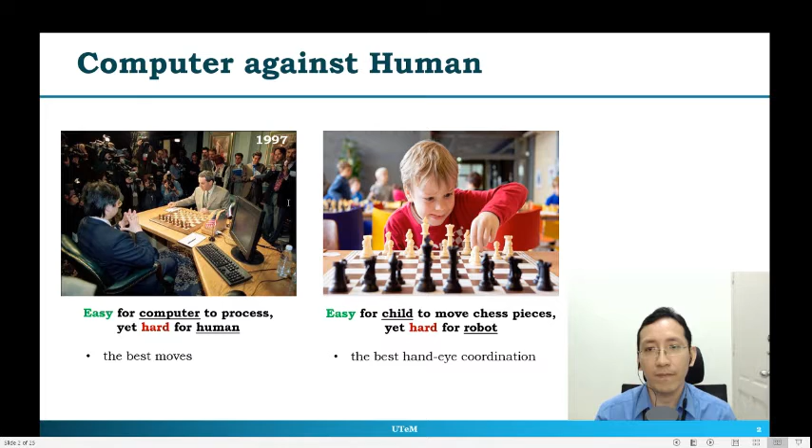But notice that in the second image, it's easy for even a small child to move the piece of the chess, while it is difficult for a robot to do so. Robots are not that good at understanding things in their world, obviously not good at visual perception, and have abysmal hand-eye coordination. So this is the cutting edge research in robotics.

When we think about robots, the definition itself comes from fiction. The way people see robots at large, like in the movies Transformers and Star Wars, is as intelligent beings that have the ability to think, move, and even have feelings. They are as well powerful, flexible, and have many forms. While the fact of the matter is, the character is portrayed by none other than us, humans, dressed in very mechanical appearances. So that is the irony of intelligent robots.

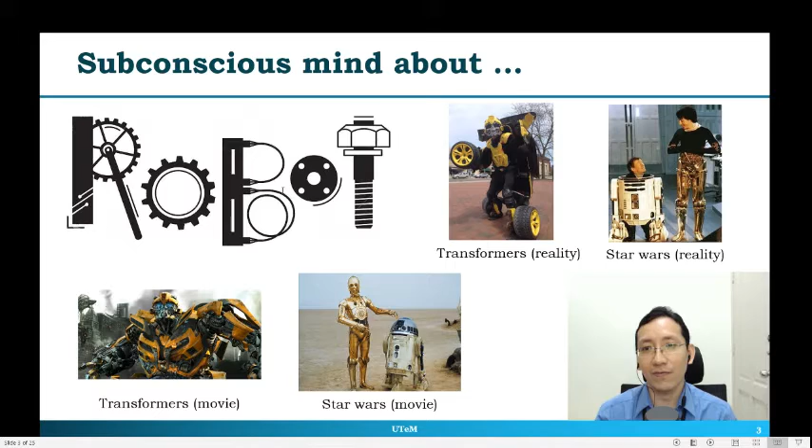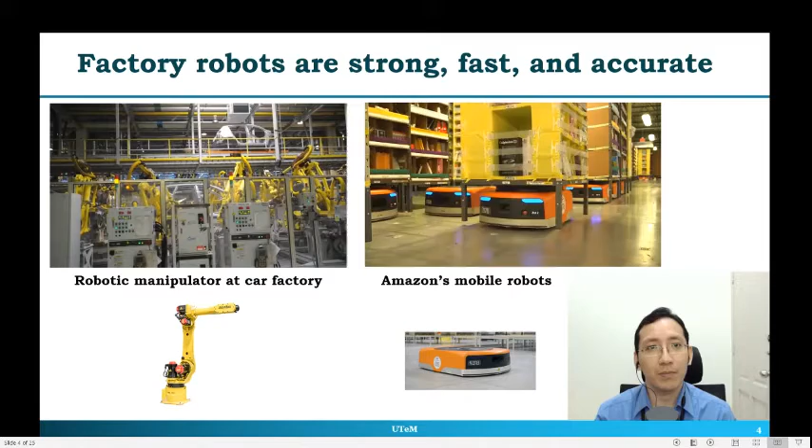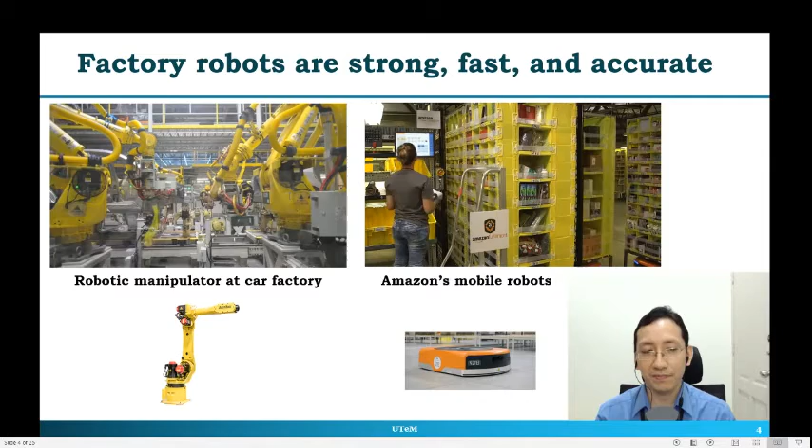On the right hand side, we have Amazon's mobile robot that transfers Amazon products. So the weight is ginormous, lifting that cannot be done by humans alone. Despite that, notice that it still requires assistance from humans, because robots are not that good at recognizing certain things, especially bad at hand-eye coordination. So Amazon employs a lot of people just to move a product from one shelf to another shelf. Suffice to say that it's a very hard robotics problem.

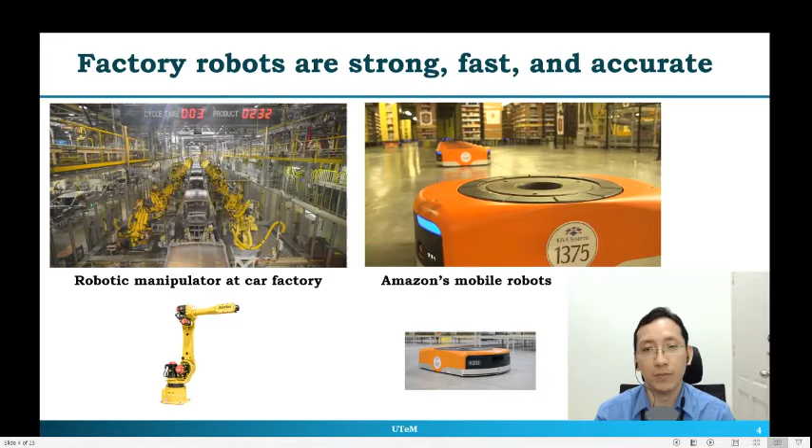And although the potential of robots is big, many industries haven't really capitalized on it yet. Yes, they have been used widely in factories and logistics, but not in agriculture, environment studies, construction, and many other industries. And this is basically the new frontier for us roboticists where we can put our effort in. So you might be thinking, why is there low penetration in such industries, right? So that's the point I want to bring in the next slide.

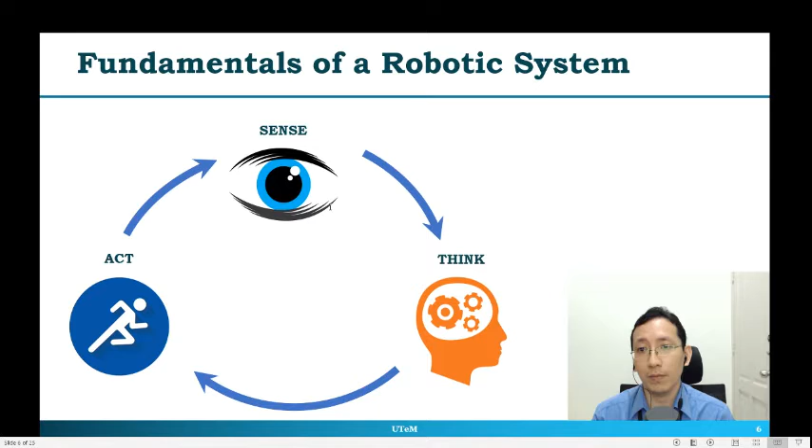In any intelligent robotic system, there are three jobs that need to be completed. It needs to sense the world, it needs to think to make up a plan, and finally act according to the plan. So let's take a look at each one of them closely. First is sensing. For a large part, vision is our most powerful sensing mechanism and critical to almost all of our daily activities. Vision is a wonderful sensor indeed; we can see things that are far away and things that are up close. It gives valuable information such as color and range of distances.

So there are even wonderful quotations from poetry. For example, beauty is in the eye of the beholder, which means the beauty of an object differs from one perspective to another. And the second one is, there is nothing invisible in this universe, there's only our lack of eyesight, which encourages us to see the whole world, to venture further. But sadly, most robots can't see.

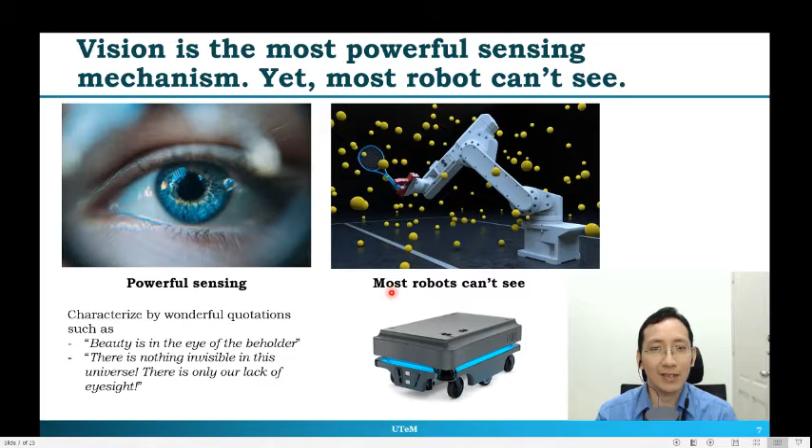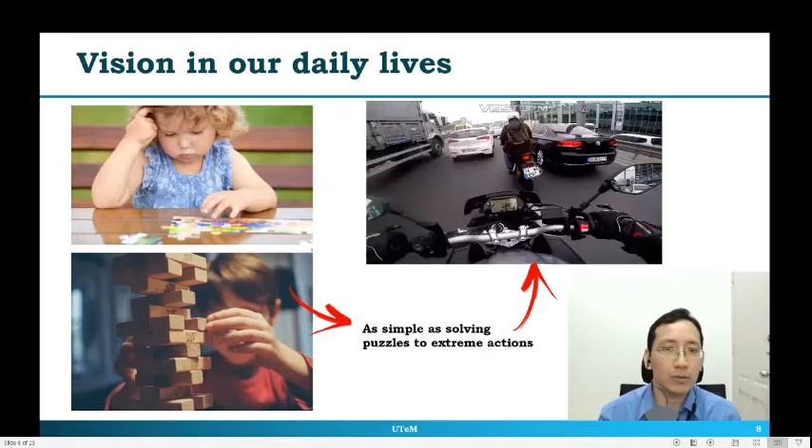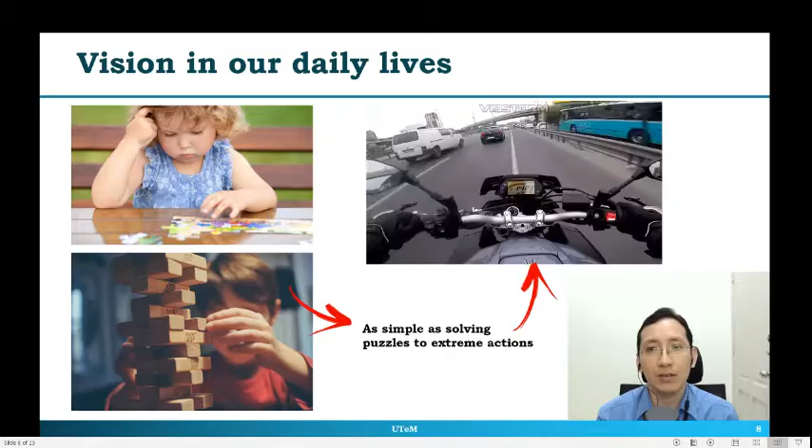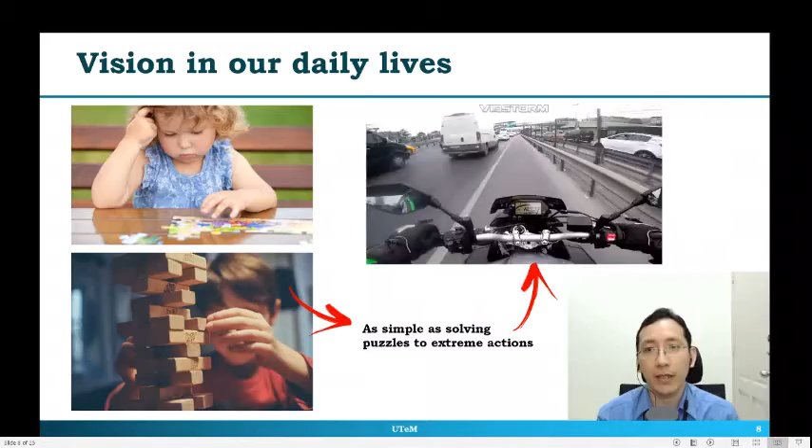And going from simple to extreme actions, on the right hand side is a person doing some crazy bike riding. Looking at the video, you notice that the crazy riding depends entirely on vision. He's riding there, seeing all the things around him through his eyes, the only sensor in play here, processing that in his brain, and then using his hands and feet to control the bike. So from all this, the bottom line is you can do if you can see.

Now here is an interesting fact. Did you know that the brain of a bee is about 1 gram? Only 1 gram, yes. Just by using vision, it kind of knows the surroundings and processes them using its brain. One scenario could be the bee uses sight to fly in order to find food, basically from one location to another location, sees the flow of the surroundings, and lands on a flower.

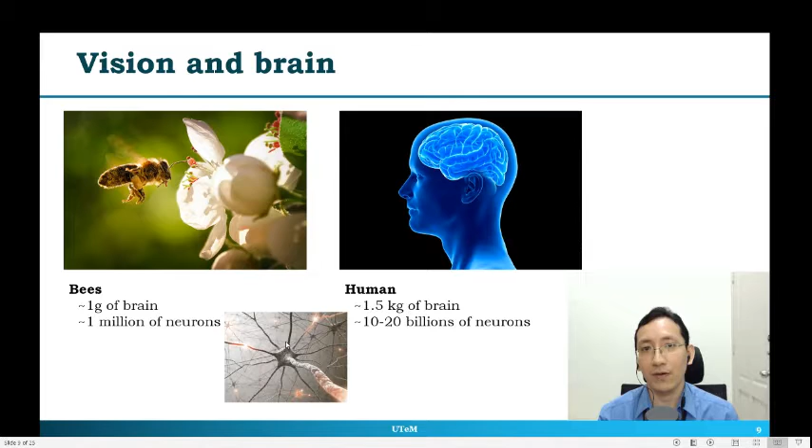So the bee is a very interesting creature, and it has about 1 million neurons. As compared to us humans, we have about 1.5 kilograms of brain and about 10 to 20 billion neurons to process our vision. So the neuron is this one. This one is called a neuron. They are interconnected among each other, and basically fire millions of signals every second. So it's a wonderful thing to see, and basically a wonderful cell for a large part of our existence.

So on the most fundamental aspect for engineers, there are only 2 schools which use vision. One is image processing, and the other one is computer vision. Image processing basically deals with, given an image, what the output is going to be. Its processing relies heavily on enhancement of pixel quality, and then removing any non-interesting features, like for example in medical school, trying to locate the position of a tumor in the brain.

On the other side, more interesting and much more relevant to robotics, is computer vision. Basically, whatever comes in, the output is going to be a description of the data, and that description is concise information of what's inside this image. So this is crucial information for a robot, because otherwise a picture is just an accumulation of millions of pixels that doesn't bring anything meaningful. In some cases, a robot wants to know that that is a person, that is an object. So anything useful that the robot can take action on. So computer vision is a critical sensing modality for a robot.

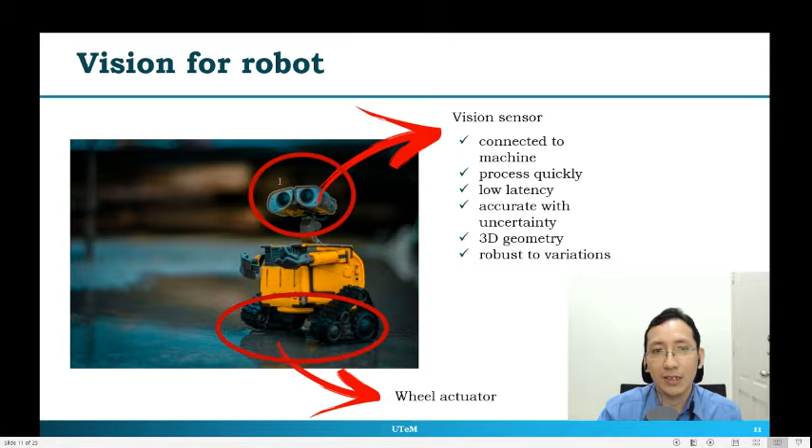So in computer vision, recognizing an object became quite famous when deep learning started to enter in the early 2010s, specifically convolutional neural networks. Just put in a massive amount of images for training, and you've got yourself a very powerful vision processor, provided that you have a very powerful computer setup and a good algorithm to process the data.

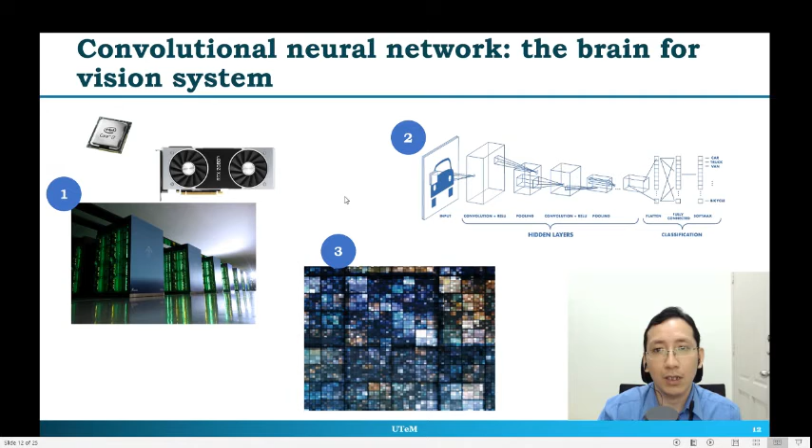So that is for sensing, in which the focus was on vision. So the next one is planning. So I know how the world is. I know where I am with respect to the world. I've got a goal. I've got to make a plan in order to get there. And planning is always considered as exercising geometry.

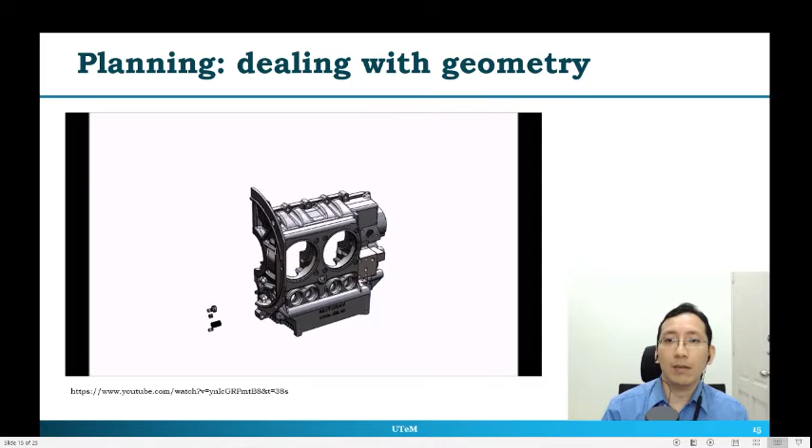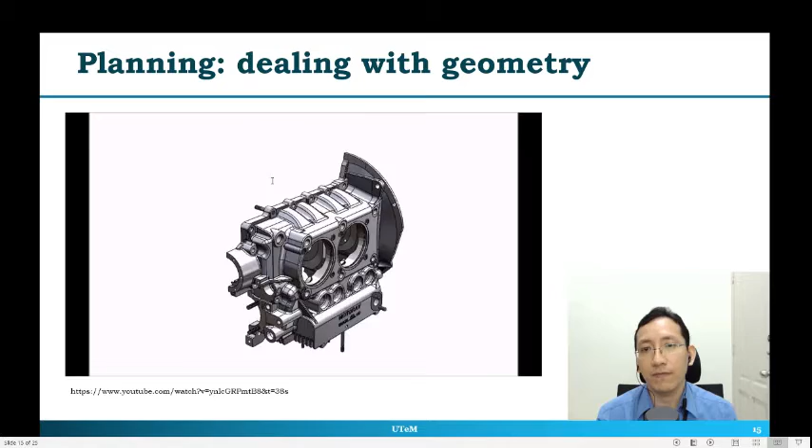So what we are seeing here is the assembly of an engine. This problem of solving geometry using robots has always been there for decades. There are wonderful algorithms to solve this problem very, very quickly and very efficiently. But before I go into that, let's talk a little bit about probability.

In every plan, there's a certain level of probability, because we know every sensory system is not perfect. Nothing is perfect, but we can say something about how imperfect it is, and then we can reason with it, coming up with a plan which is best suited for the situation. And this is one of the most important steps for robotics evolution to increase its capability. There can always be many outcomes, but to say whether the outcome is optimized is a different matter altogether.

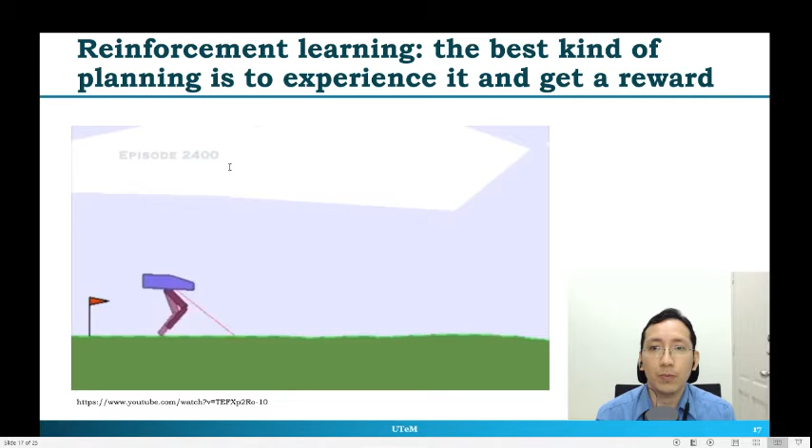So what's really happening right now in robotics is called reinforcement learning. Let's say I would like to program this robot to walk. The traditional way to do that is to write some equation of motion that describes the movement of legs, and then apply physics and math to make the robot stand up or bend 30 degrees, maybe 60 degrees, and so on. And then dynamically we'll take force and momentum into account, right, for walking.

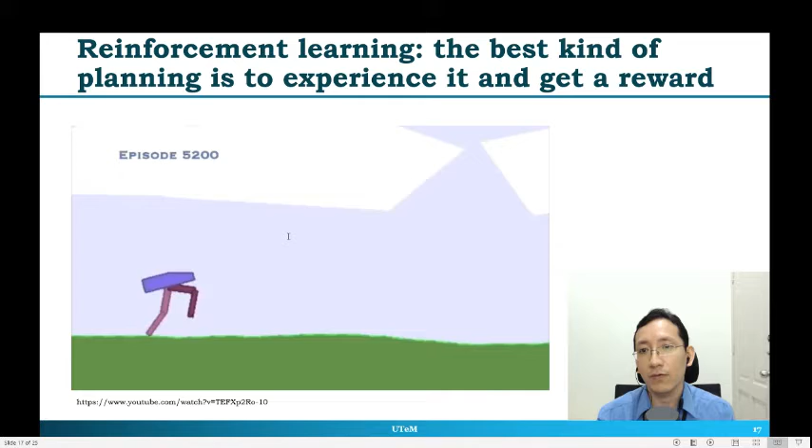But with reinforcement learning, we don't do any of that. We simply apply a reward function, and we reward this robot if it moves forward and doesn't fall over. And after a huge amount of physical simulation over time, now its episode is 5200, it's starting to move or starting to walk. Not very elegant, not very graceful, but with the reward function not only does the robot stay upright, but it can move forward for a very long period of time.

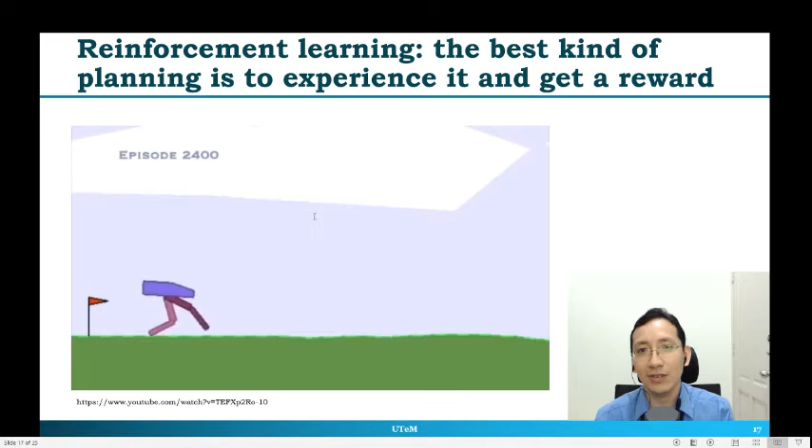But perhaps you could say something about how graceful the motion is as well. This is high gracefulness, high probability of walking with high stability, right? Because it is similar in our case as well. When we try to walk, we don't know the equation of walking, right? We're just learning by experiencing it, and then maybe our parents give us food as a reward, then we can train it to get proficient at it. So that's basically the biological process of how we walk.

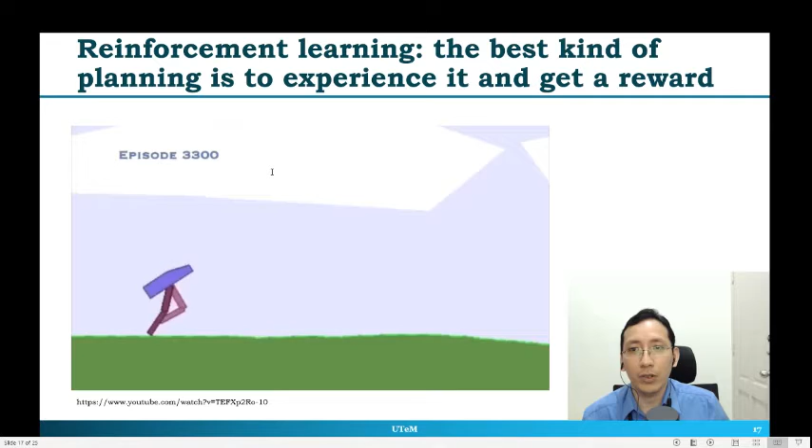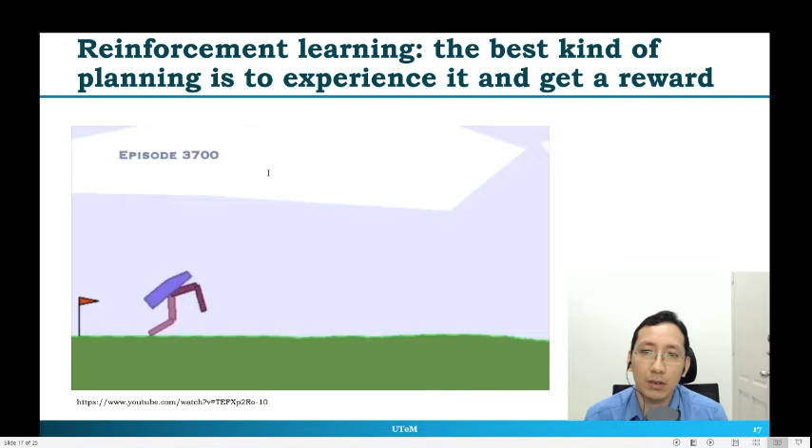So this is a new, I would say, new way of programming robots. We don't think about the mechanism using math anymore. We do it in simulation. We learn in a virtual world. Once we train in the virtual world and put them in the real world, it's a pretty good starting point, and we can do more learning in the real world. This is such a big revolution in robotics.

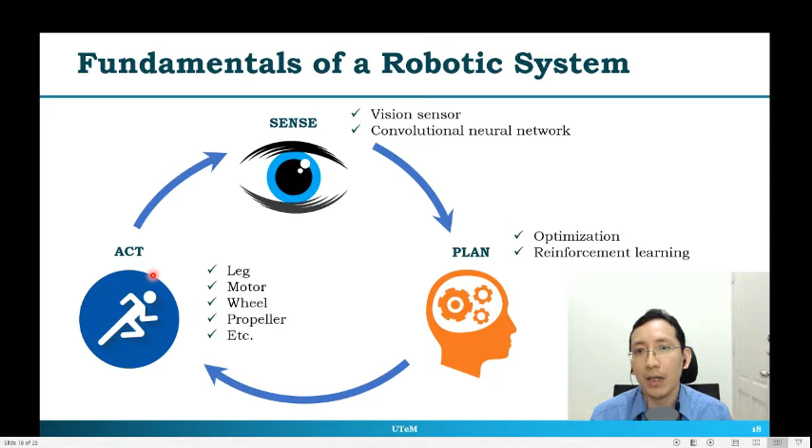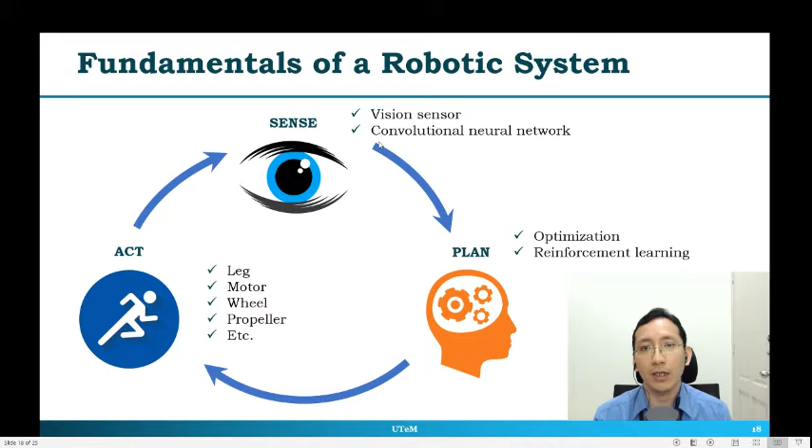So that is the thinking part. We have done the thinking part. The last part is about the acting part. How does the robot perform some actions? Definitely there's an electrical motor in there that moves stuff. A robot might have propellers, might have legs. So there's a lot of mechanisms that a robot could use to move through the physical world. So those are the fundamentals of a robotic system. You got sensing, you got planning, and you got acting.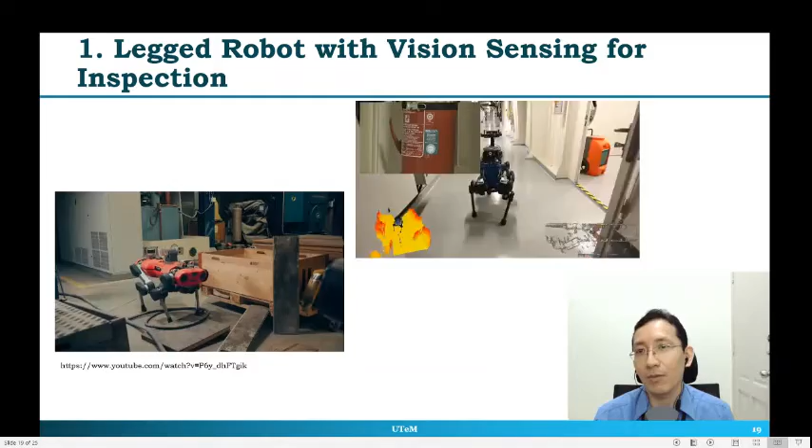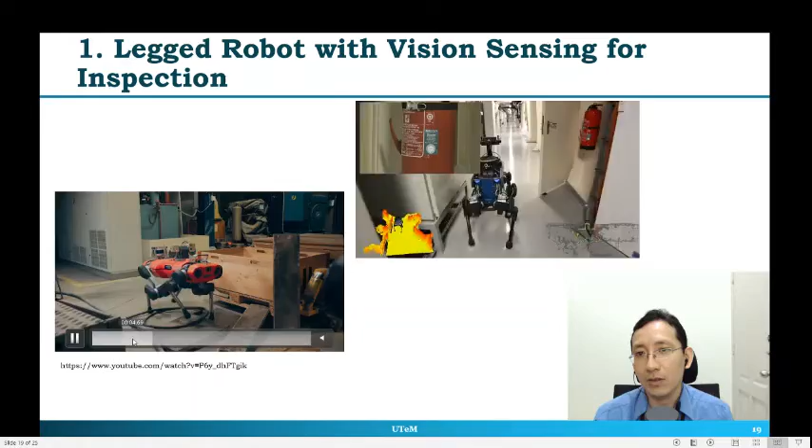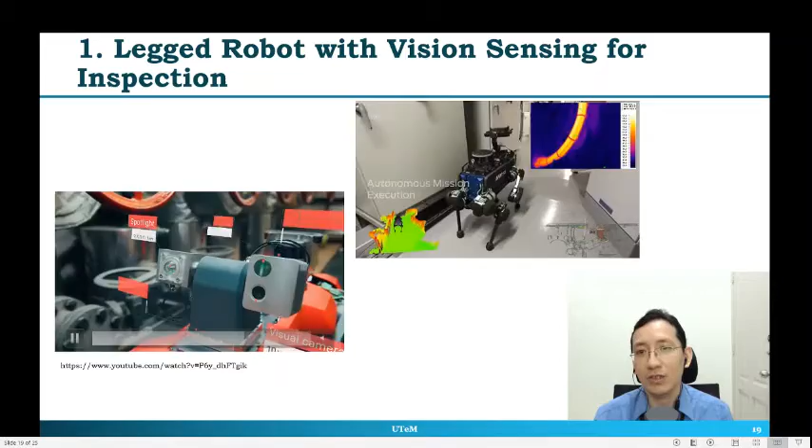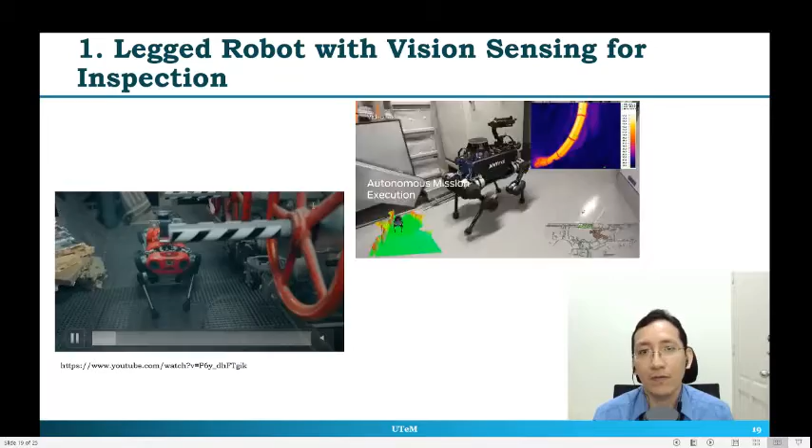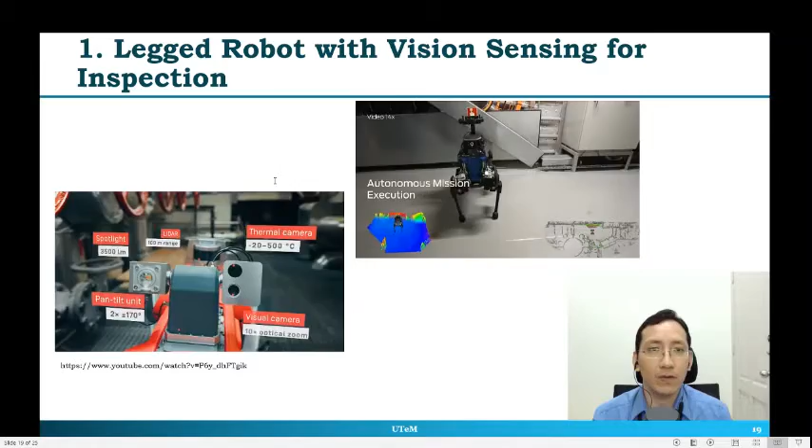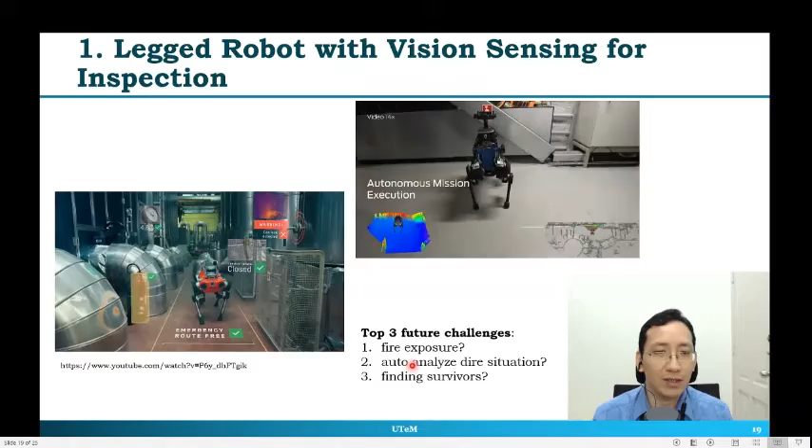And although it has a lot of capabilities, there is still room for improvement. For example, maybe you can ask, is it robust enough to be exposed to fire? Can it analyze dire situations? Can it be used to find survivors? So those are the top 3 challenges.

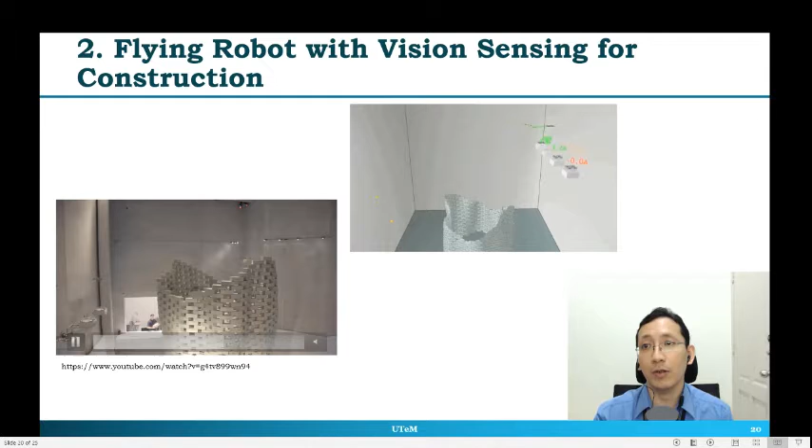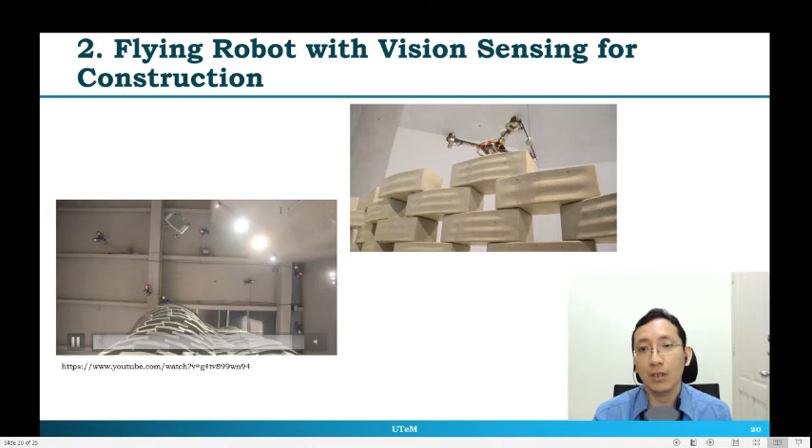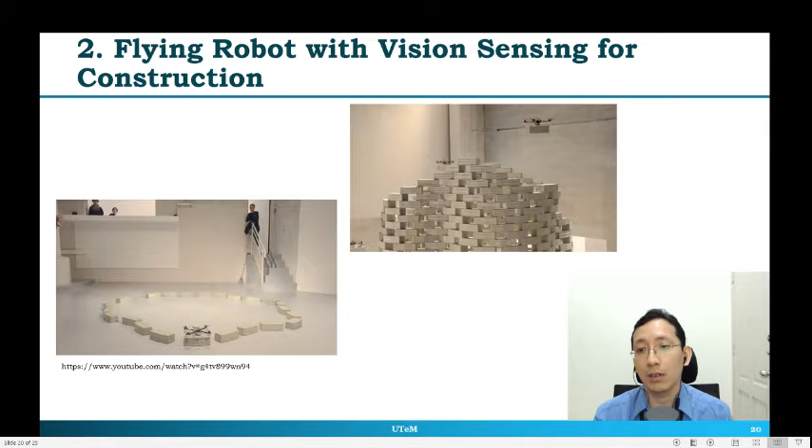There's the one on the left, a little flying robot that picked up blocks and put them into a big complex stack of building. So you can imagine this in a construction scenario. It kind of accelerates the construction process.

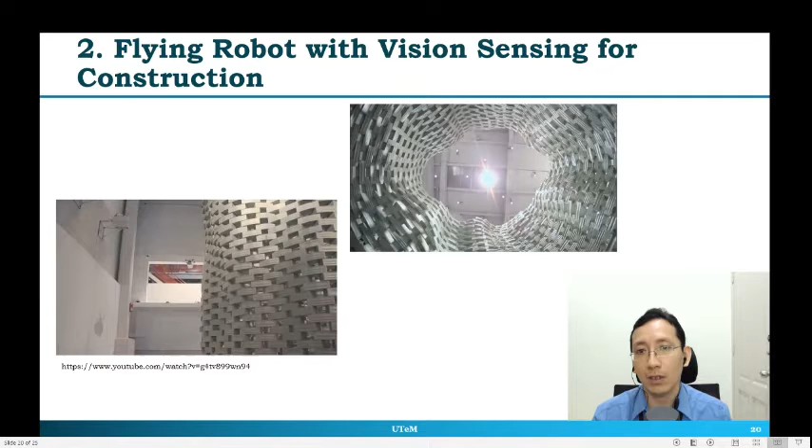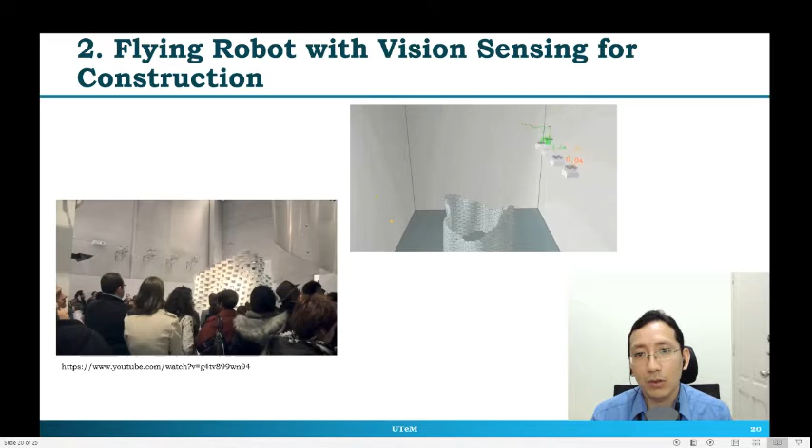So on the right hand side, there's a simulation of monitoring the battery state, for which the robot can charge its battery. It has its own charging station, right? Its own charging station. So when it is fully charged, it basically can continue working where it left off. So you can use this instead of, for example, a crane, right? So there are people exploring various robotics capabilities in flying robot technology.

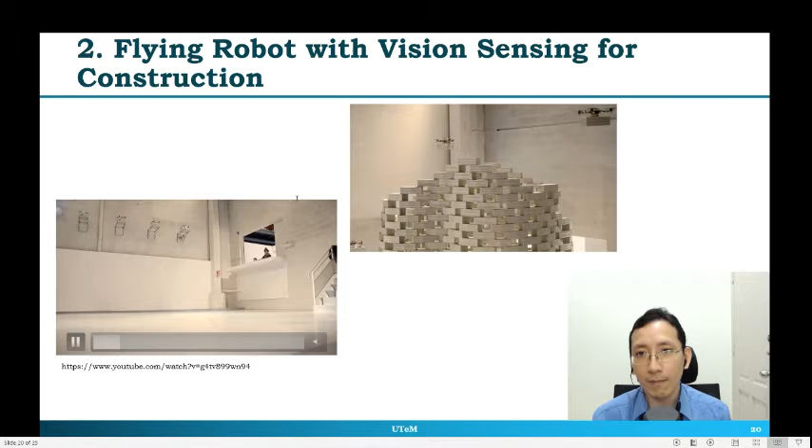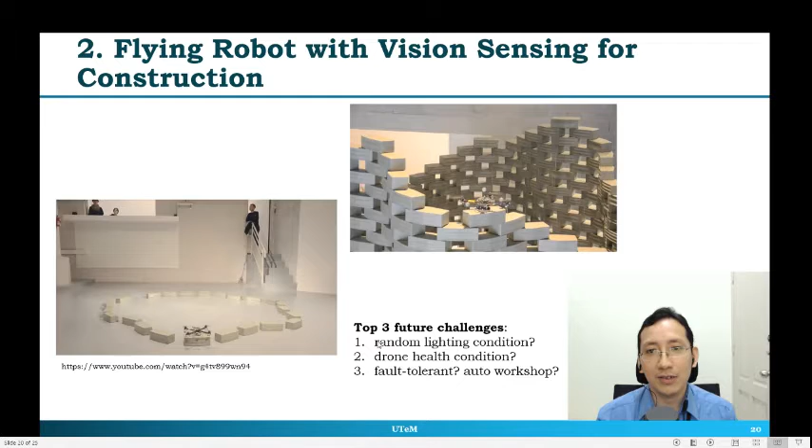The top 3 challenges are: what about random lighting conditions, can we know the drone health condition, how does it perform when one of the propellers breaks down, which is fault tolerance, and it would be nice to have an auto workshop.

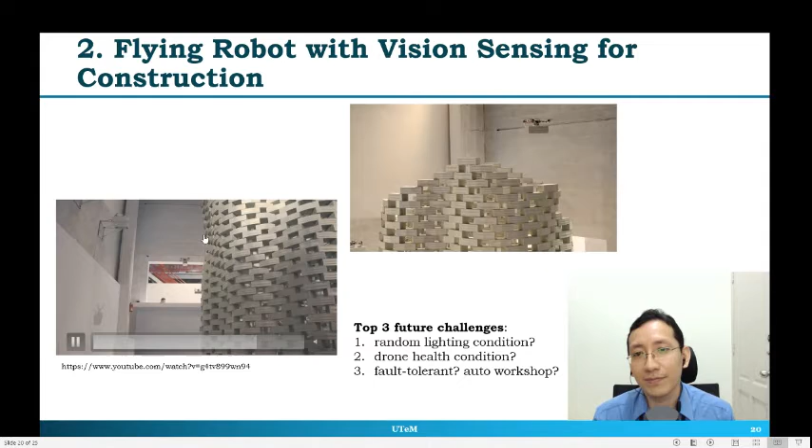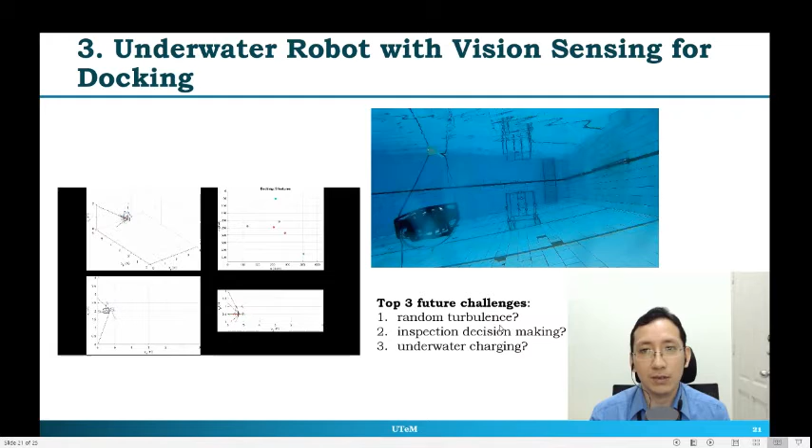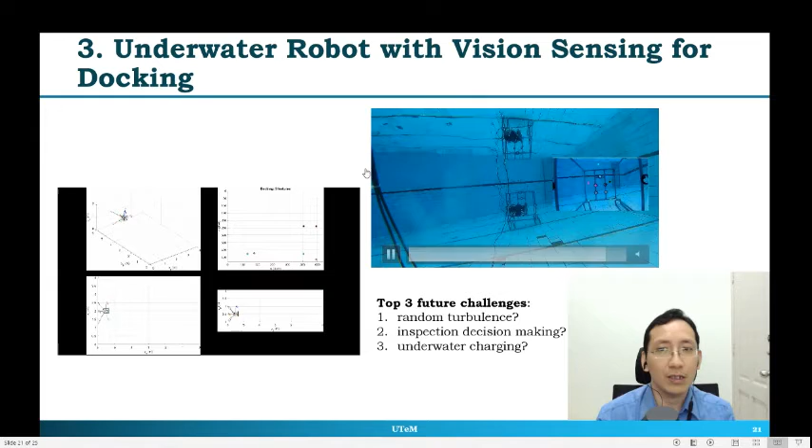As for the top 3 challenges, what about random turbulence? Can it go through it? Second, when doing inspection, for example, when you want to inspect the hull of a ship, what about the decision making? And then the third one is underwater charging, which is quite a complex process and interesting research to explore upon.

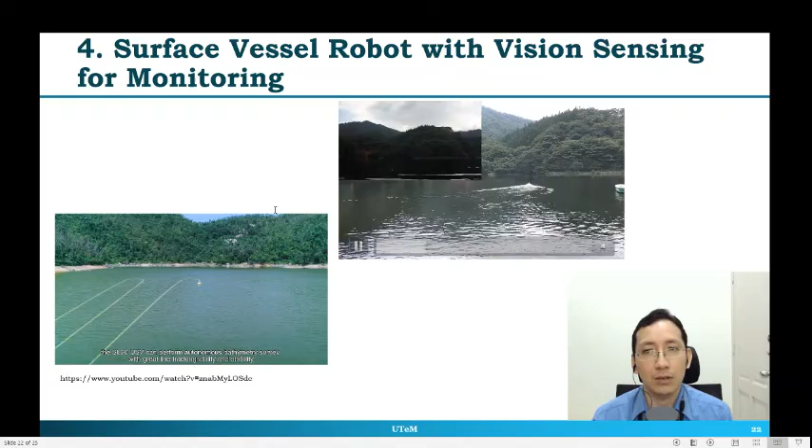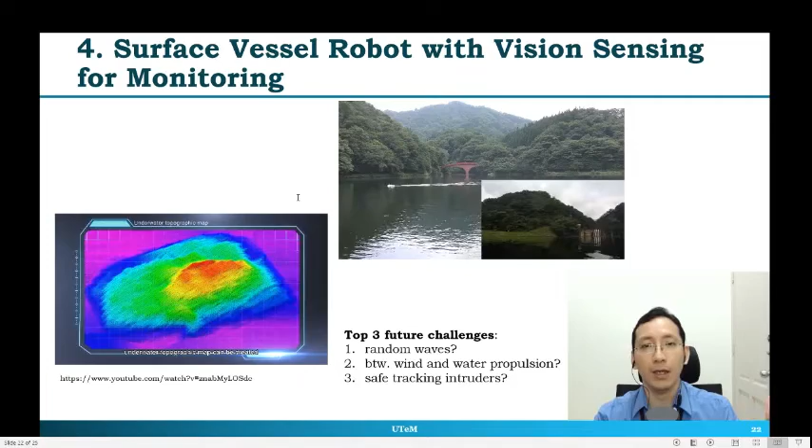And the top 3 challenges are number 1, what about the random waves? Will it fall over? Which one is the best one between wind and water propulsion? And how about safe tracking of intruders? Because when you want to track the intruder, you want to make it at a safe distance, right? You want to know whether it is intruders or maybe someone fishing. That one would be interesting.

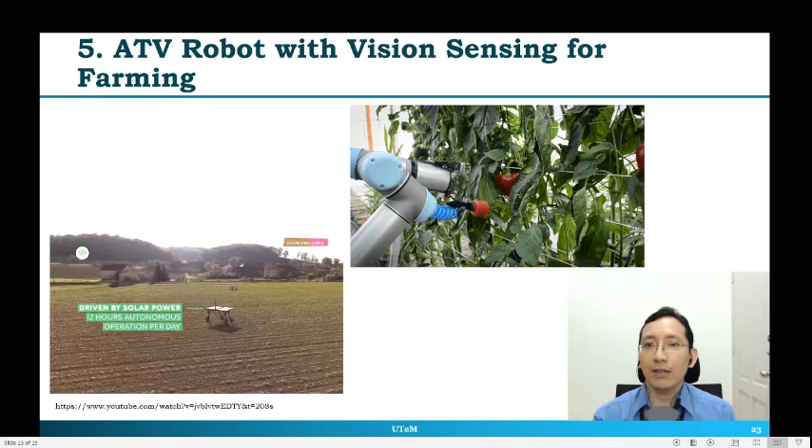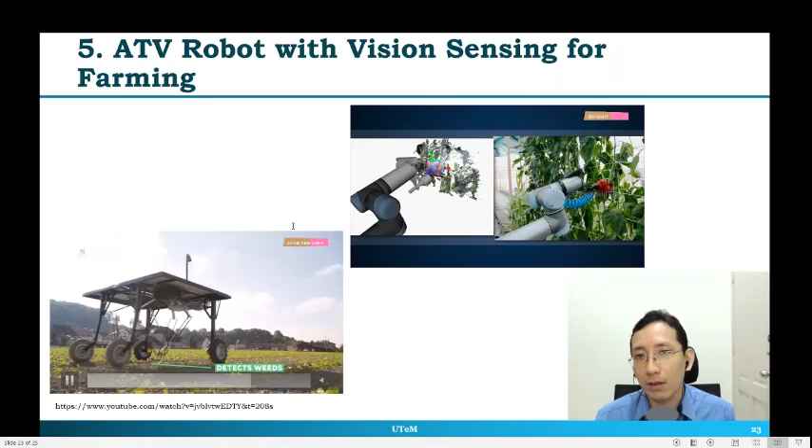And this is the last one, all-terrain vehicle, ATV. So the vision sensing is used as well for farming, and you can see here that there's a camera to recognize plants. It uses once and then it can use a microdose of herbicide to kind of target where the weed is, and then it's gone. Don't have to spray all of the plantation side.

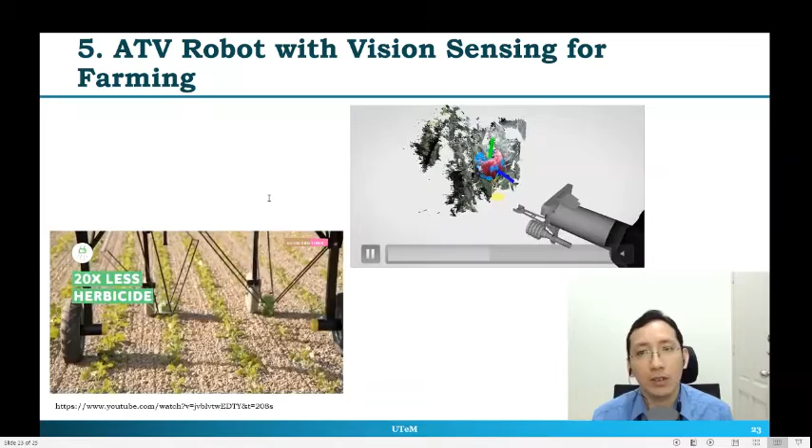So on the right hand side, there's a manipulator to pick peppers, finding the best position to cut and pull the pepper. There's a 3D visualization to kind of depict the environment. This is using computer vision.

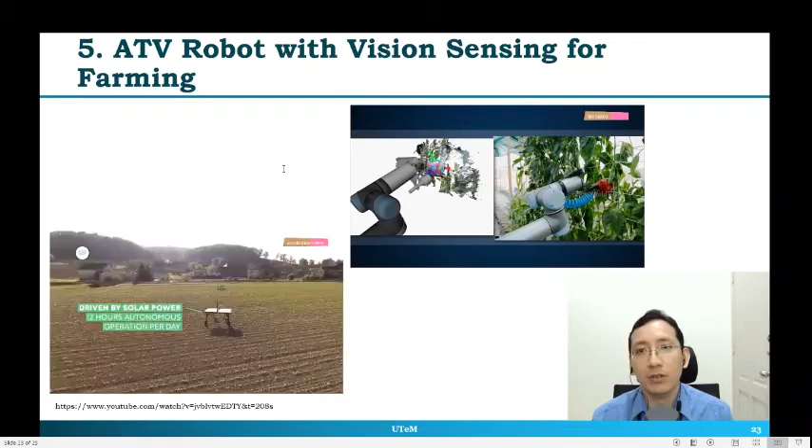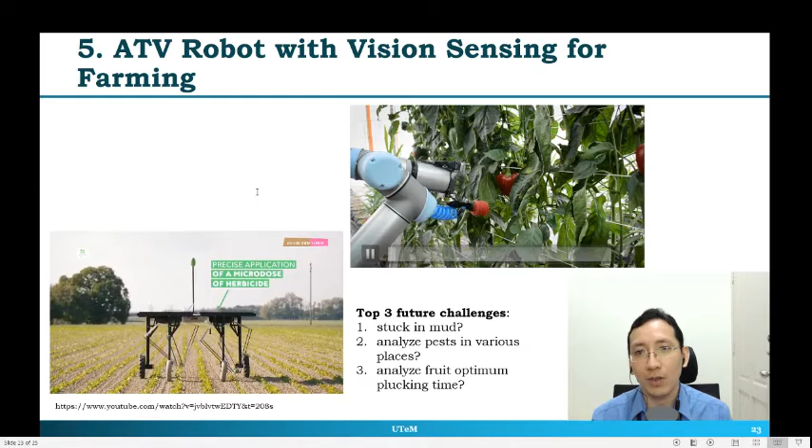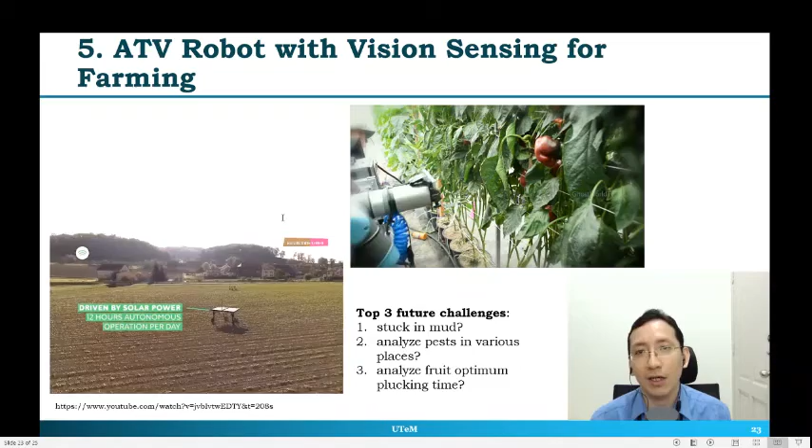And the top 3 challenges, what if the ATV is stuck in the mud? So what is the available option? How to analyze pests in various places, because for chili trees, even if there's a small amount of pests in one day, the next day the whole row got damaged. They require sensitive care. And then how to analyze fruit optimum plucking time.

So I just want to end with: there is always a trade-off of robotic vision. The good: it increases the quality of life. What you saw just now, automation farming, there will be less starvation problem. Everything can be done quickly to produce food, and the tech is more durable and efficient. It will increase productivity level from automation, and it can create new job opportunities like high skill operators to kind of maintain robotic systems.

The bad: there will be privacy invasion. For example, a Tesla car has 8 cameras. Imagine 1,000 of them moving in the cities. So you got yourself a whole bunch of data. You'll have limited privacy. Then the loss of traditional jobs.

This has been undergoing for every decade, right? For those who live in the older generation, there's no longer transportation like beca or horse riding. I remember during the early 2000s, there were no more bulky handphones. Famous at that time was the Nokia 3310, and even now it's gone.